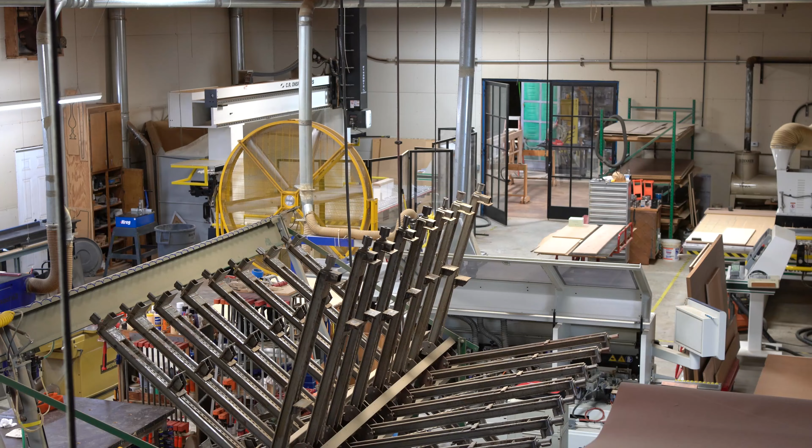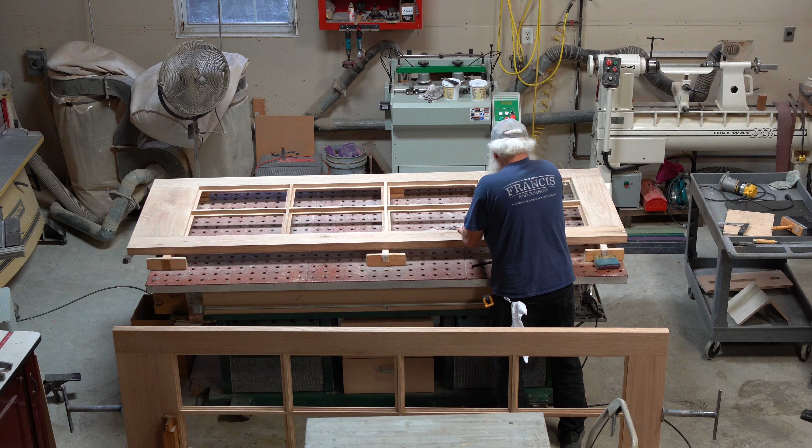We started this company about 22 years ago. It came out of a love for woodworking originally. Our first projects were mainly furniture, and eventually we grew and started doing a lot of residential cabinetry, a lot of front entry doors, a fair amount of carving, and so that's been our specialty and remains to be so to this day. We have approximately, at any given point, about 5 people on the team. That ranges from our metal side to our wood side.

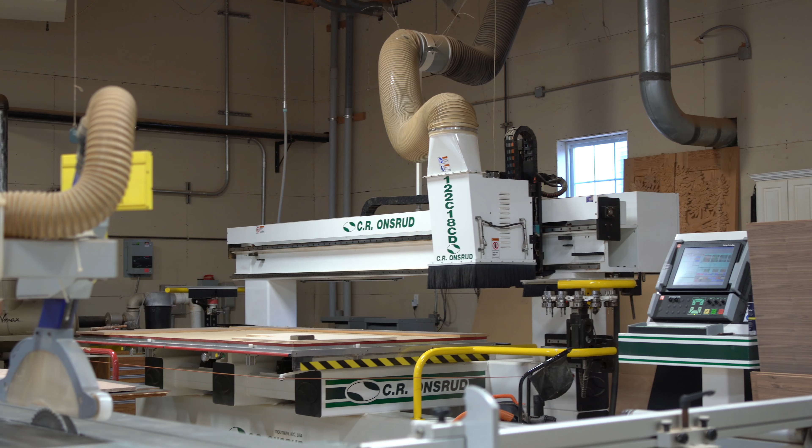The challenges that we faced before using SWOOD, we had used 2 to 3 different softwares. Any kind of carving, any radius work, bowls, anything that required 5-axis work, we couldn't use the initial software that we bought. Moving into SOLIDWORKS and having SWOOD, it allowed us to integrate not only the design process, but also the manufacturing process. It made everything so simple, allowed us to machine not only the 3-axis, but also the 5-axis simultaneously.

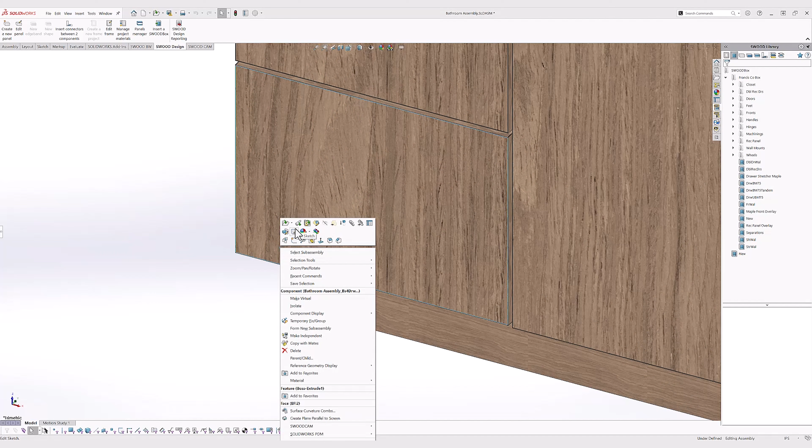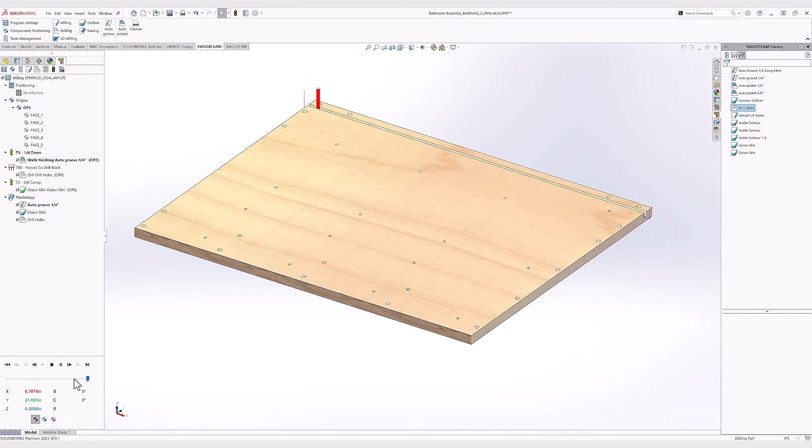So in the design process, in using SWOOD, the very first time we started using it, we realized that it was going to basically streamline our manufacturing process, specifically with cabinetry for hotels that we've been focusing on. It allowed us to use different materials, different laminates, different edge banding profiles. It really allowed us to look at the project in a 3D manner within the design process to see what mistakes we were making. We weren't able to efficiently do that before, but with SWOOD, we've been able to take more control of the project, specifically in the machining process.

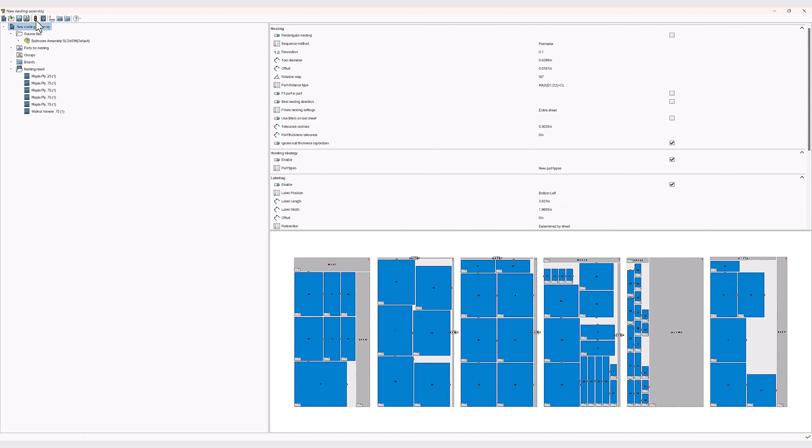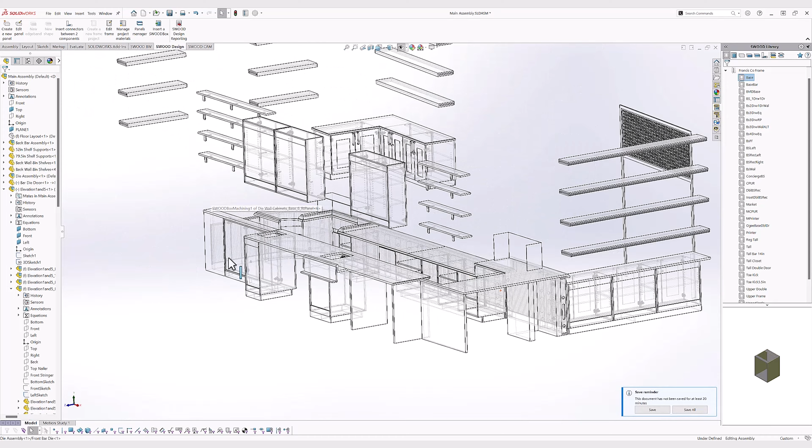We've integrated with a 6-face nesting, which allows us to flip the sheets effectively and do both sides of the panel. When we initially started using the dowel insertion process, using SWOOD allowed us to control the dowel insertion in terms of the setbacks. It also allowed us to look at the dowel in the 3D process, allowed us to align them from one side to another, which we weren't really effectively able to do with previous software.

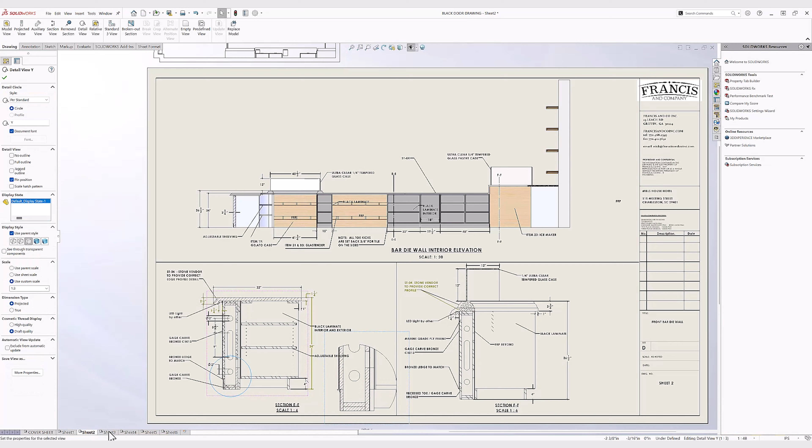One of the benefits of the connectors was, especially with our drawers, we were able to machine the drawer parts with confidence. We are able to see our slides. We were able to choose different manufacturers for the slides that we use. We don't typically use just one. We have several that we are forced to use for our larger commercial jobs. When we machine our drawers now, we don't have to do them by hand. We're able to use the machine to do that, and SWOOD made that very, very easy.

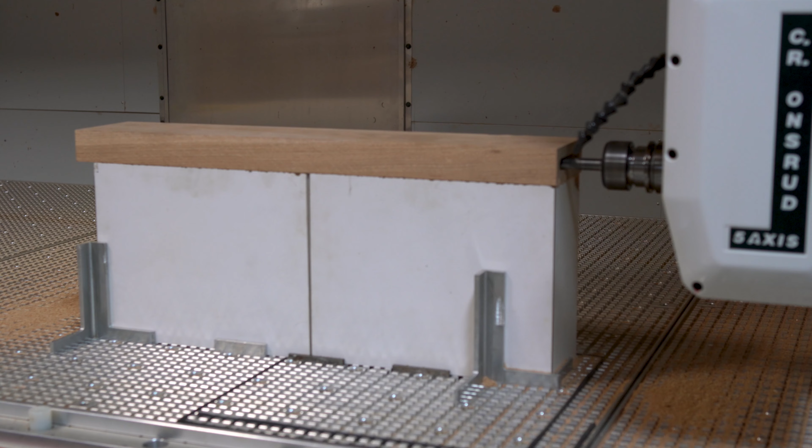The fact that we're able to take it from the design process directly to the machine, there's no in-between software that we have to use to basically streamline the process. It's all in one step. It's a no-brainer for us. It's just completely saved our time versus how we used to do it before.

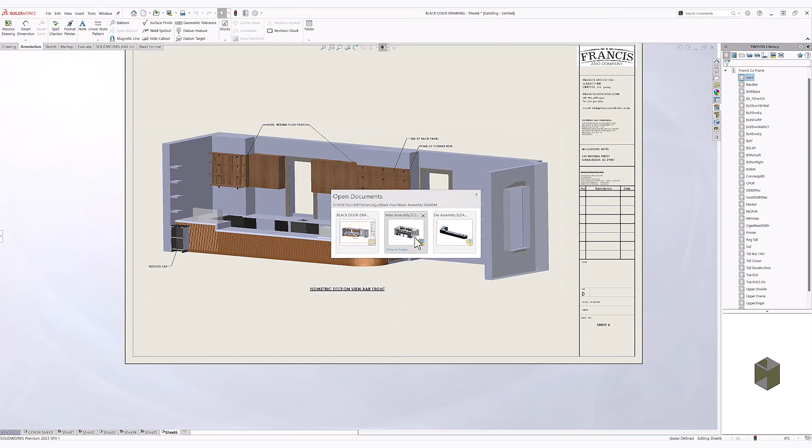Initially, we would take the design, move it from one software to another, then hope that the manufacturing process would line up. In the SWOOD format, we're able to take it directly from the drawing straight to the machine, and we're also able to give the drawings directly to the client as an as-built. So it's been a huge time saver for us.

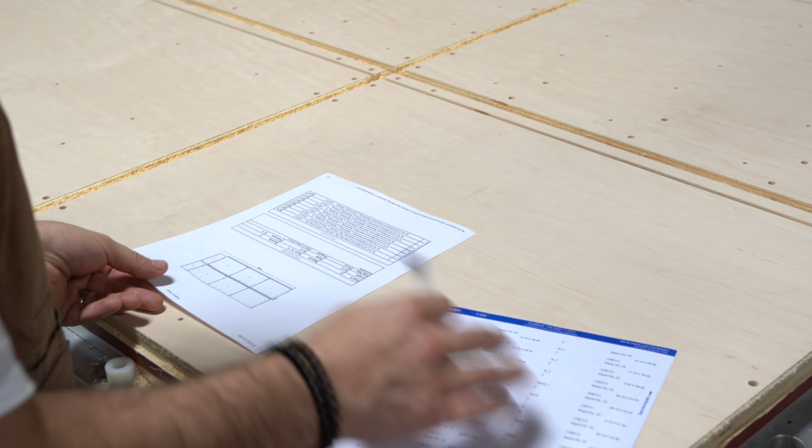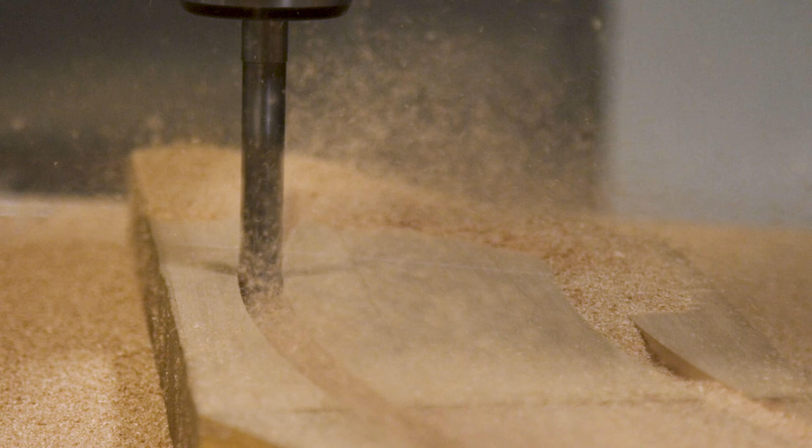It's just a no-brainer. Our intention is to start making a little bit more furniture and moving into things like commercial banquet furniture and FF&E items. SWOOD allows us the flexibility to move into those items seamlessly. The connectors and the ease of machining just makes that so simple for us.

We are still doing a high volume of commercial, which SWOOD has allowed us to do, but what we've found now is that as we move forward, we'll probably take on more highly customized one-off items, and with SWOOD, it's very easy for us to do either the high production or the one-off items.